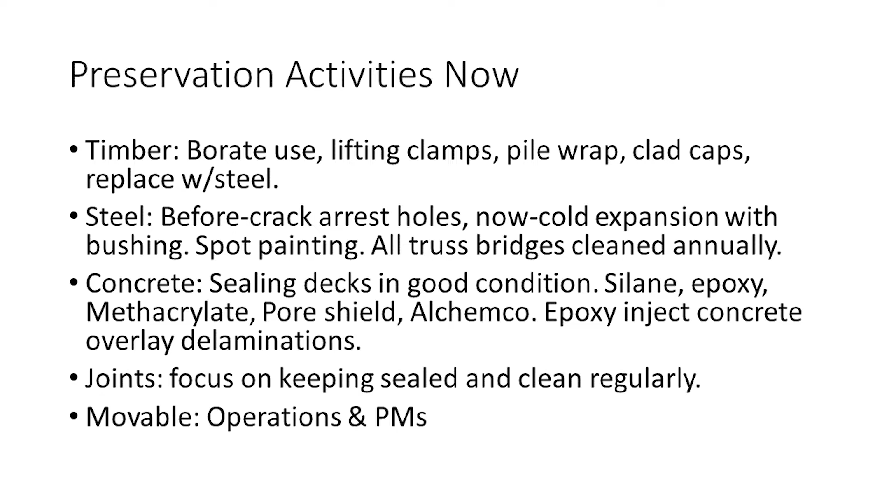On the joints, we're focusing now on keeping, if we put in a new seal, we try to come back annually and clean it out really good, make sure it lasts longer. And if it looks like we're having a problem, we reseal it. And we continue with movable operations. They all have a list of everything they do. They have a program that pops up, what they do for daily work, weekly, monthly, annual, and so on.

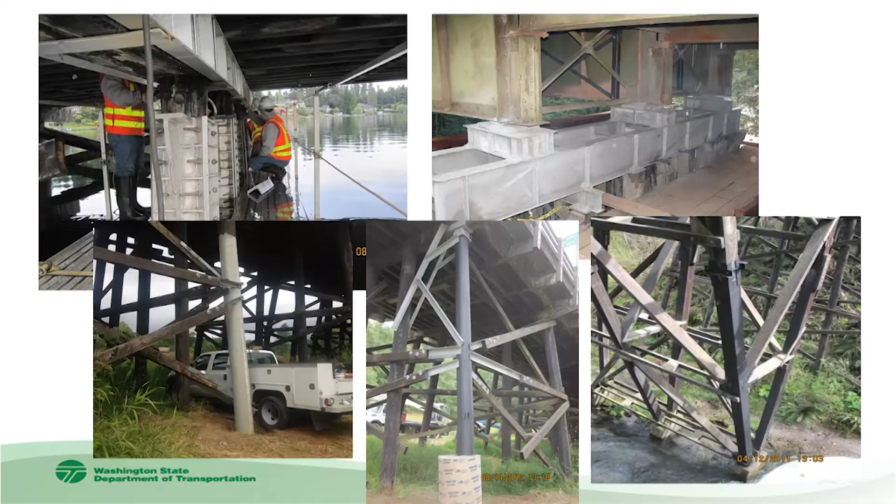And timber bridges, what we've done, if you see the clamps on the one on the left, those are aluminum. One of the problems we used to have is how do you replace a cap over water? Because you can't build any and raise it up. So instead, one of our maintenance people came up with these aluminum clamps. They're fairly lightweight, clamp to the pile, and you can lift up the cap.

And what we did is, instead of replacing the cap, we had our bridge office come up with a design, and what they did is they just clad the cap. And the steel that we put in there is sufficient to take the load that the cap used to do. And so you only raise it up a little bit, you put that in place, you bolt or you weld it in place, and the bridge is good to go. And we have a couple bridges where every cap has been treated that way.

Another one, we had an entire bent that we jacked up, put all new timber members in. What was there before was old growth timber. What we put in is new growth. And within 6 months, we had to replace those because they crushed. Because the newer timber just couldn't take the load that the old growth could. And so we replaced everything with steel, and that's been there now for about 15 years.

We've also been replacing piles that are really too far gone to repair with steel, and we make a connection with concrete around the base. We've also replaced square members with square steel members, paint them black so it matches what's there. And we've also tried wrapping some piles with fiberglass wrap, pumped those things through with borate, and then we pumped in epoxy into the voided members also.

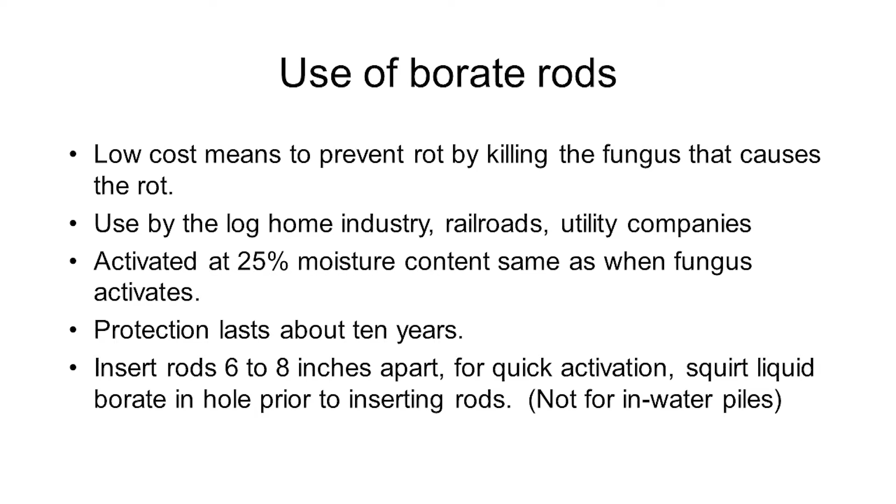For bridge cleaning, preservation actions with bridge cleaning is we hand clean first. We spot and area paint as needed. We include cleaning decks, drainage, and pier caps. Another thing, if you don't know, the U.S. Department of Agriculture, if you have a bird problem on your bridges with pigeons and starlings, you have to worry about those two things because they're not protected species. You call in USDA, they'll take care of them for you.

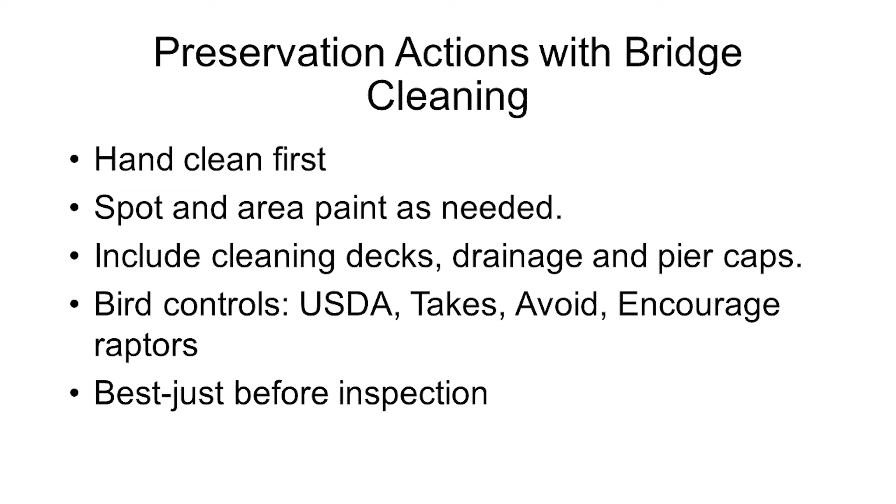We also like to encourage raptors, hawks, to kind of keep the pigeons and starlings away, so we like to encourage them to stay. Another thing is to do your cleaning. It's best if you can plan those things to do them just before the inspection, because especially bridges with birds, we find that between the time we inspect it and 10, 11 months later, they're too dirty to actually do a good inspection on.

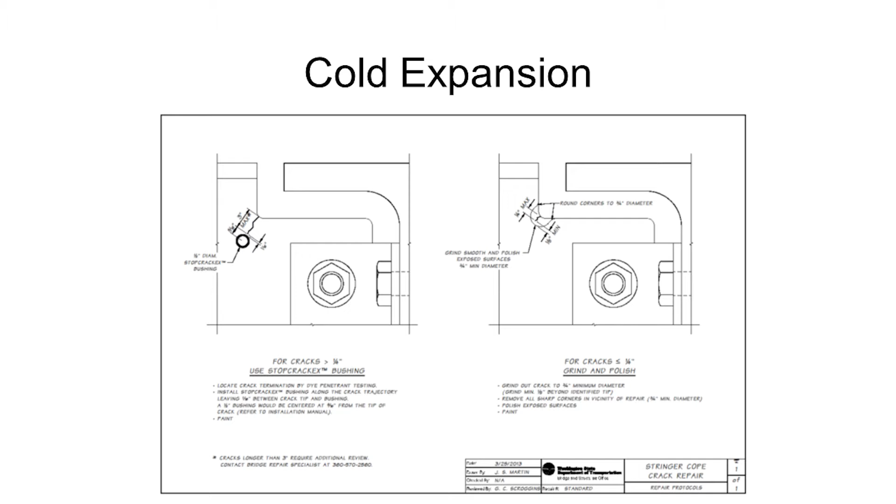Cold expansion. Here we actually have a plan set for doing the cold expansion. Here's a picture of that. What you see up at the top, that hole, that's the crack arrest hole. And that tail on that thing is the crack that propagated within a year. When we put the bushing in, that's what you see down below. We used the mandrel in there, expanded that. That's been in there about 4 years now without the crack going beyond it.

One difference between the crack arrest hole and putting the bushing in: with the crack arrest hole, you find the end of the crack and you bore your hole there. With the bushing, you want to leave 2 millimeters of steel in there. You don't want to drill it at the end of the crack. You want to at least have a little bit of steel left in there when you bore your hole and put in the bushing.

Preservation actions that go to contract in Washington: paint steel bridges. We have a backlog of $777 million in our painting work. It's really our plan to do steel trusses about every 20 years. We've actually had to extend that to at least 30. Steel girders that are kind of protected by the deck, we think we can get 30 years, but we've had to extend those to about 40 years.

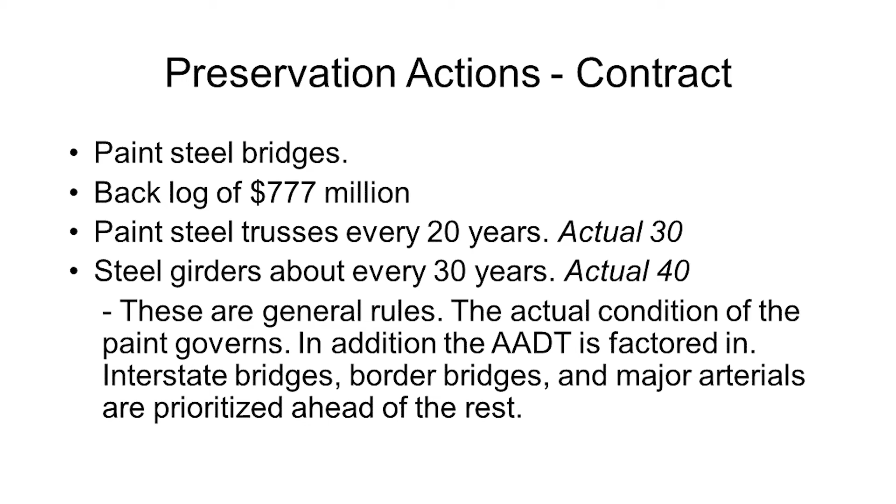These are kind of the general rules. The actual condition of the paint governs. In addition, the average traffic is factored in. Interstate bridges, border bridges, and major arterials are prioritized ahead of the rest when we do our work. There's not enough money to do everything, so you've got to do what you can.

And one of the things we did is we have our maintenance crews doing some touch-up painting. This is a two-part. We had the Termarust people come. The shiny stuff you see on the left is actually a fixer that fixes the rust in place, and then you overcoat it after that. It's really ideal for maintenance crews to go out. They can clean it, and you don't have to wait for that first coat to set up. You just paint right over the top.

And this bridge is 507/114 Deschutes River. You see the steel there? That's kind of historic because those are part of the floor beams of Galloping Gertie, the original Tacoma Narrows Bridge. When that thing failed, you see 1943, steel was hard to get. We were making tanks with everything you could make of steel at that time. So you couldn't find much steel, but we had this leftover.

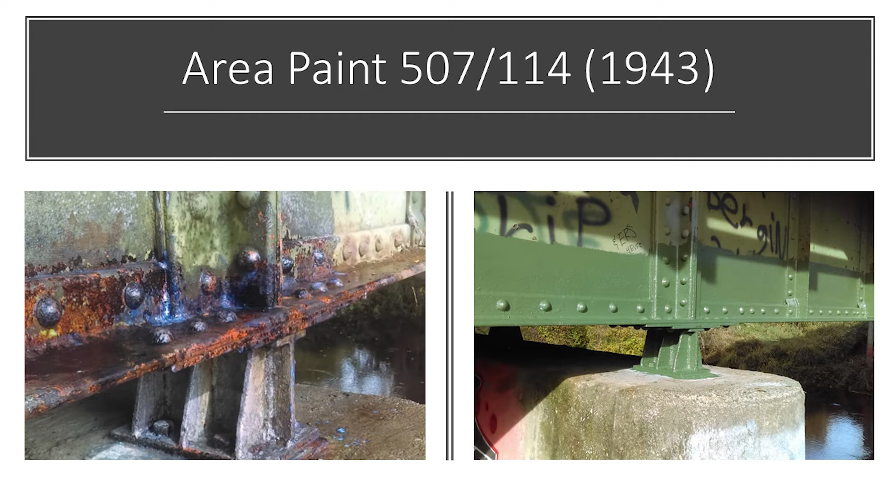They were taking apart the old Tacoma Narrows Bridge that had failed, and there were a lot of bridges built in that time from the parts that were left over as they tore them off Galloping Gertie. And these are some of it. Engineers hooked the floor beams together, and this is continuous across. It's a 3-span continuous steel. There's 4 girders made up of the floor beams from the original Tacoma Narrows. The steel is still in pretty good shape, and it's got a 6-inch timber deck on top.

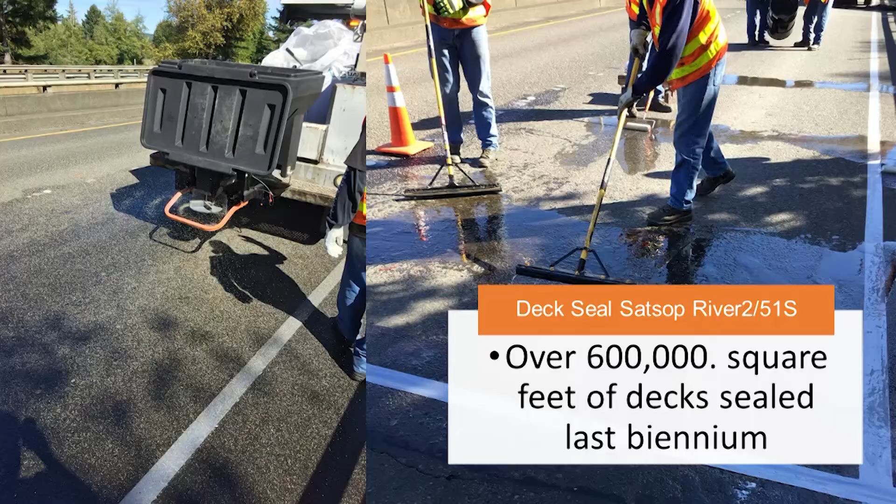Here's a deck seal. As of a year ago, we've done with maintenance about 600,000 square feet of deck sealed. This is a picture of Satsop River Bridge, 1251 South. They just kind of squeegee everything. This was an epoxy. And rather than having buckets, which the first few we did with sand and spread it, they got a salt spreader on the back of a pickup truck. I think Minnesota and some other states have entire trucks that do all this work for you. So they've gone a little farther than we have. We're still learning.

Further questions? I skipped number 2. I'm going to run out of time, so I'm only answering about: how does your state identify, same as we did back in 2010? How are your bridge preservation activities funded and dedicated? I'll show you what that is. Then I'm going to talk about our performance goals. We've changed those. Examples of successful preservation strategies, I think I already covered that. How are bridge preservation needs prioritized versus rehab and replacement?

In the State of Washington, we are funded just by our gas tax. And right now, the gas tax in Washington is one of the highest in the United States at 49.4 cents.

And this has been very progressive. You get 9.5 cents to a nickel added, and the latest was 11.9 cents. And one of the things, my daughter worked for the Senate, and in order to get that 11.9 cents, you've got to get enough legislators to vote for it. In order for them to vote for it, they're going to ask for something. And it could be a new interchange, it could be as simple as a crosswalk somewhere. But they're going to want a piece of that so that they go back for their vote next year and say to the people, here's what I got for you, this is why I voted for the gas tax.

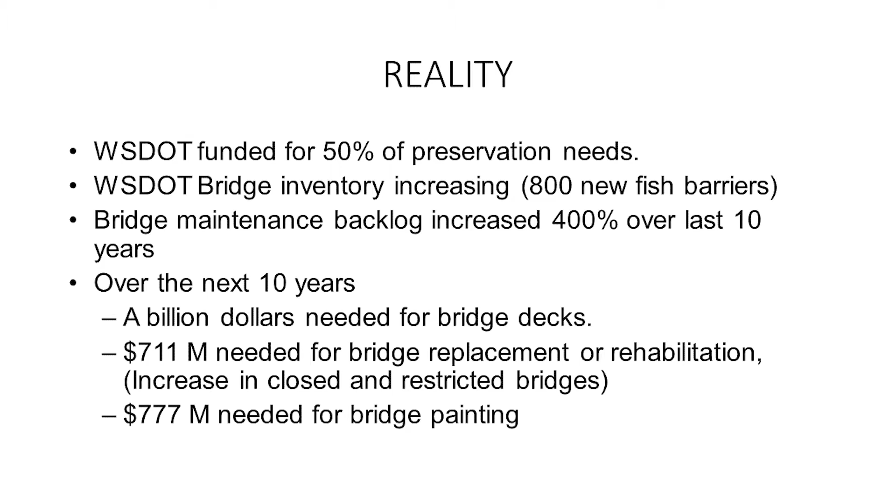Our inventory is continually increasing. We got sued by the tribes in Washington that a lot of our culverts are fish passage barriers. So we were turning these little 4-foot diameter culverts into 400-foot bridges so we can make sure that fish can get through. Our bridge maintenance backlog over the last 10 years actually increased 400%.

And over the next 10 years, what we expect is $1 billion needed for bridge decks, $711 million needed for bridge replacement or rehab, and $777 million needed for bridge painting. And this does not include major bridges. The Columbia River crossing is not in that amount. So we'd have to find, and that's another $1 billion right there, I think.

There's hope for bridge washing. Again, we got funded $2 million per biennium. We got our bridge cleaning permits, steel truss bridges. The washing program was praised and emulated. Federal Highways said that Louisiana, Kentucky, Rhode Island, Columbus, Missouri, all these have used what we've done. Like I said, this networking, it's gone out beyond that.

New funding strategies in preservation. What they did is they carved out $6 million from our preservation program to give to maintenance, because we can do stuff in maintenance for about 1/4 of the cost of going to a contract. And these are fairly small. We can take care of this. If you figure what it takes to put a contract together, go out to ad, and then you still have to have your people go out and inspect them and so on.

If you give it to maintenance, it's theirs. They own it. If they screw up, they've got to go back and fix it. And so we can do it for quite a bit less in maintenance. And so for things like deck seals and some of this other stuff, we can do it fairly inexpensively. Bigger projects, yeah, those need to go to contract.

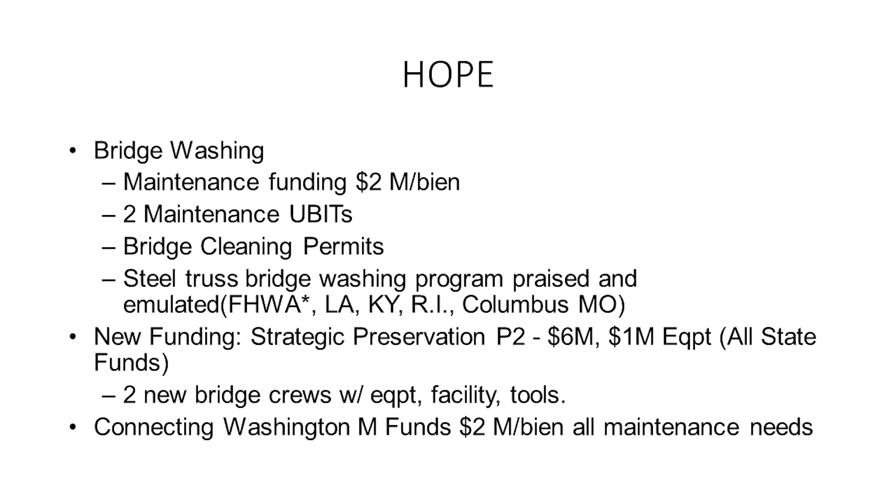But what we were able to do with the $6 million is to form 2 new bridge crews, along with their equipment, their facility, and their tools. Besides the $6 million, we also got $1 million to get the equipment and a place for these people to reside. Also, the legislature gave, in Connecting Washington, some maintenance funds, $2 million per biennium for all maintenance needs, but for some reason we haven't tapped that yet, because we got that and then this COVID thing hit. And so we actually sent everybody home for a while, and so we got further behind.

Our performance goals. In 2010, our performance goal was bridges in poor condition. We wanted that less than 10% by number of bridges. Now, we flipped that. Bridges in fair or better at 90% by deck area. We used to count by bridges, now it's by deck area. And we don't look at poor, now we look for fair and better. So we have backlog reports and paint, overlays, replacement, rehabs. That's continued. Maintenance, continuous percent of priority 1 repairs that we get from our inspectors.

Percent of steel trusses cleaned. We have like 126 steel trusses. We try to clean them annually. Decks, what we do is each of our regions comes up with how much they think they can get done in the biennium, and that's what we compare. We're nowhere near getting to everything we need to do. So if we looked at just the bridges that we ought to do, we wouldn't show a very good report. But we put what we intend to do, and at least it looks a little bit better.

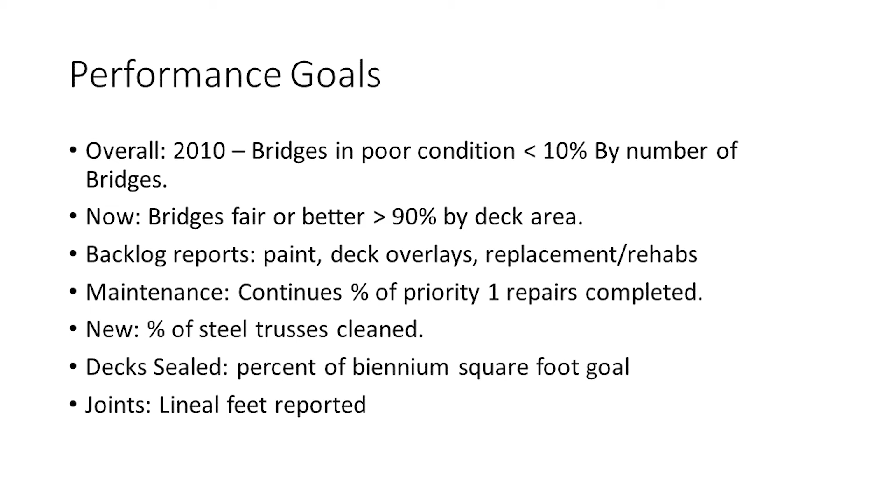Along with joints, lineal feet, we report how much we think we can do over the biennium and then see how close we can get to that. How are bridge preservation needs prioritized versus rehab replacement? Our funding comes from the legislature, and I think I already covered that, and also they had to carve out the money for fish passage barriers because the court said we had to do all those.

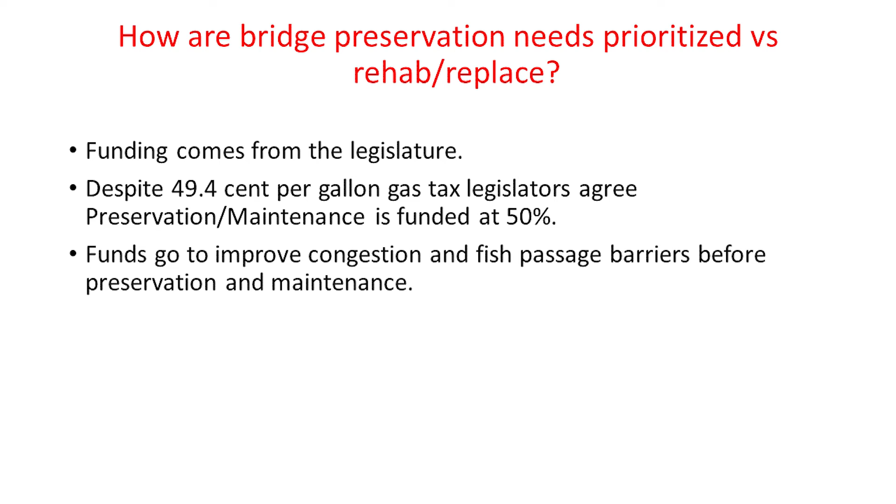The next couple of questions is how do you capture work accomplishments, and approximately what % of your bridge maintenance is corrective versus cyclic? So how do you capture work accomplishments? Contract preservation, painting, deck overlays, said it was an increase or decrease in our backlog. Repairs that come from the repair list generated from bridge inspections. These are prioritized 1 to 4. 1 we're supposed to do within a year, down to 4, which is just keep your eyes on it. And so it's a % of priority 1 repairs completed within a year of notification. As I pointed out, that backlog of those repairs has increased over the last 10 years.

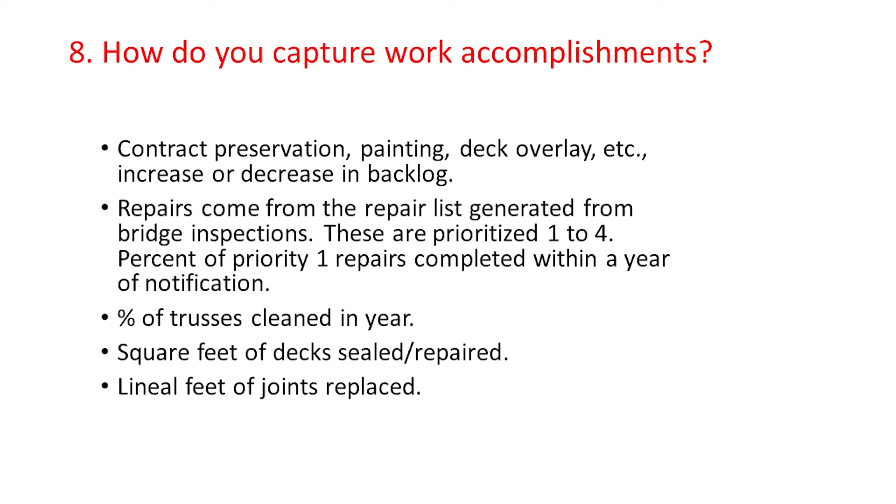% of trusses cleaned. Up until the pandemic here, we were getting those 126 cleaned. And then the square feet of deck sealed, again, these are covered, and the joints, we just decide what we think we can do with the funding that we have and see how close we can get to that.

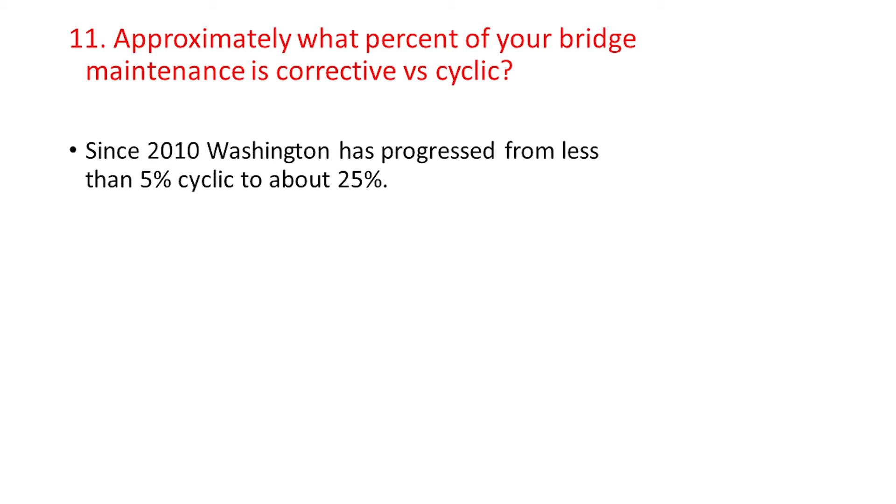And approximately what % of your bridge maintenance is corrective versus cyclic? Since 2010, I think, we were like firemen back in 2010 because we had a bridge hit with pothole. We were running from bridge to bridge. People would call up and the bridge crew would change whatever they're doing that day to go take care of what was wrong today. And so we really didn't have a plan. We just reacted to the circumstances that occurred.

But now I think we're up to about 25% because we do address bridge cleaning. We're doing more. We're carving out the money. We're given the money for preservation, the cyclic type. So we try to get our deck seals. I put a big emphasis on replacing joints. I think that's the number one thing, if you're going to prioritize anything. Because we started using salt, whereas 15 years ago we didn't salt in Washington. We put down grit, but we didn't salt, but now we do. So it's important we get that salty water stopped at the deck level and get it washed out.

So now we put a big emphasis, and I looked at our interstates, our multiple lane, and I started going down from Oregon up. There wasn't a bridge that I found where we didn't have leaky joints. So we could just start from one border and go to the next and just have projects of replacing joints. That was kind of the condition of our joints, unless it's a brand new bridge. I could expect that the bridge's joints would need replacement.